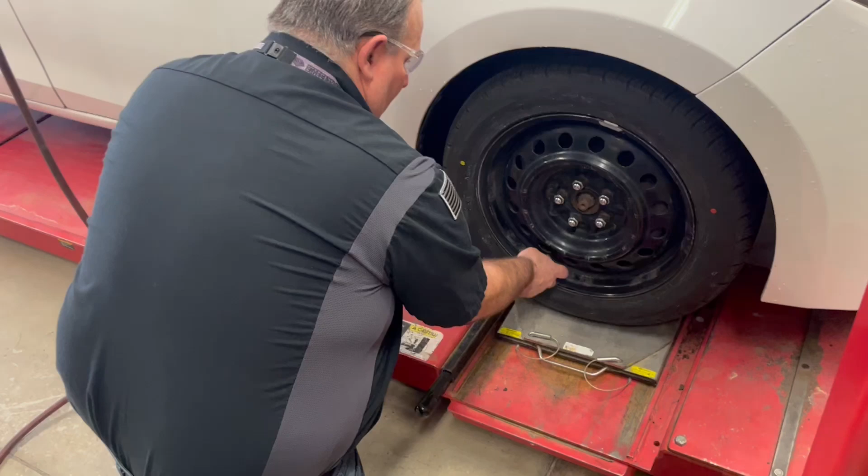To begin the alignment, we are going to remove any valve caps and inflate the tires to the specified PSI on the door jamb. This vehicle requires 35 PSI. I go and check all 4 tires to make sure they are at 35 PSI.

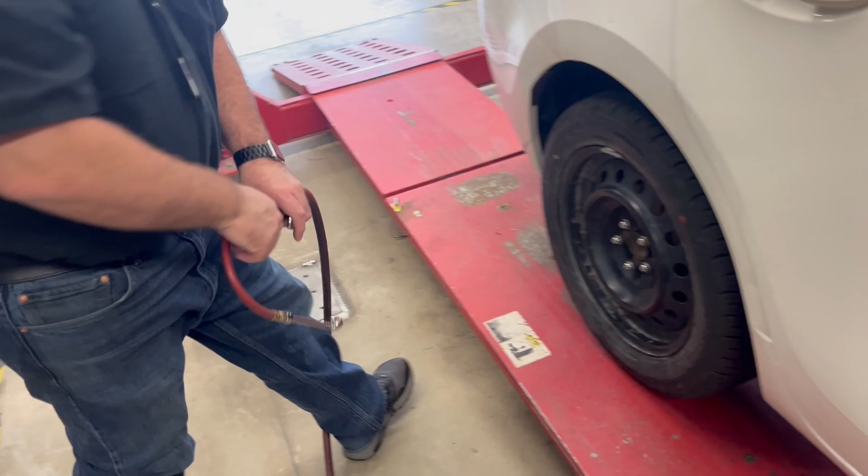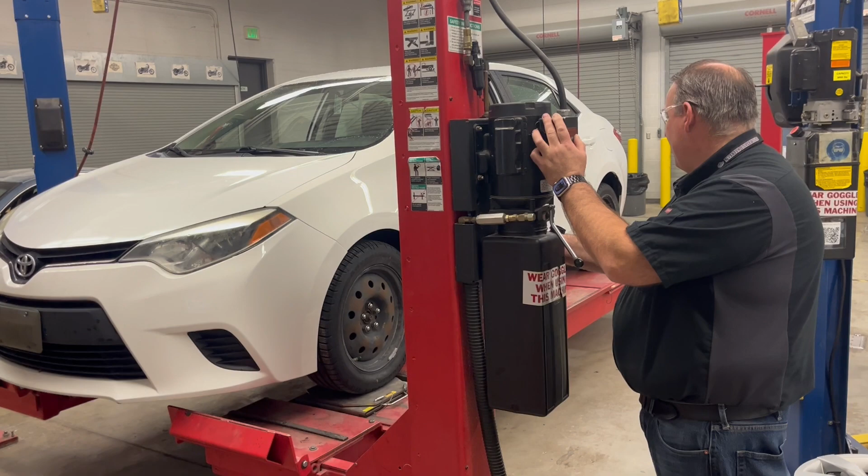After I inflate the tires to the proper pressure, I'm going to lift the vehicle on the alignment lift by pushing the button at the top and lifting it to about waist high, then lower it onto the safety locks.

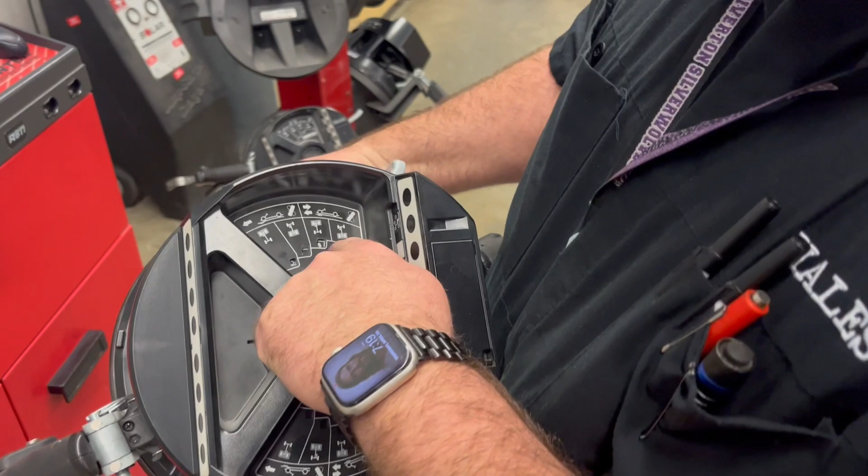Next, I'm going to grab the alignment head. These heads are equipped with markings, and you can see there are a couple of patterns where these heads are rotated with the tires. We have a front-direction-only head and a front-and-rear-direction head on the right.

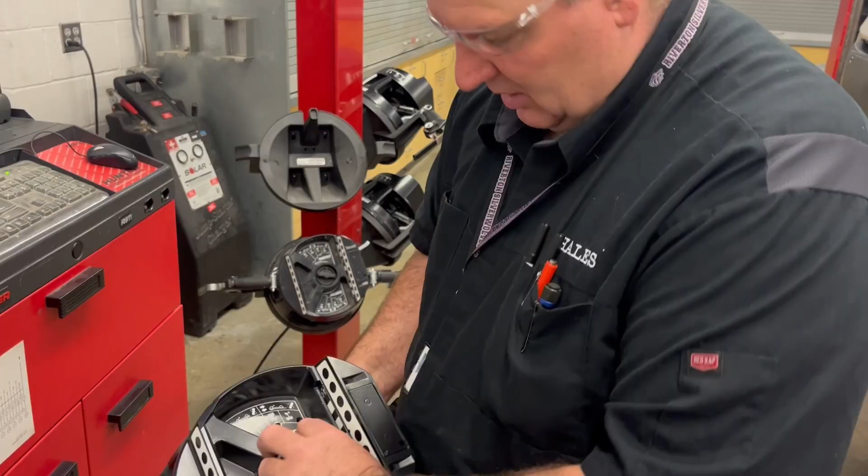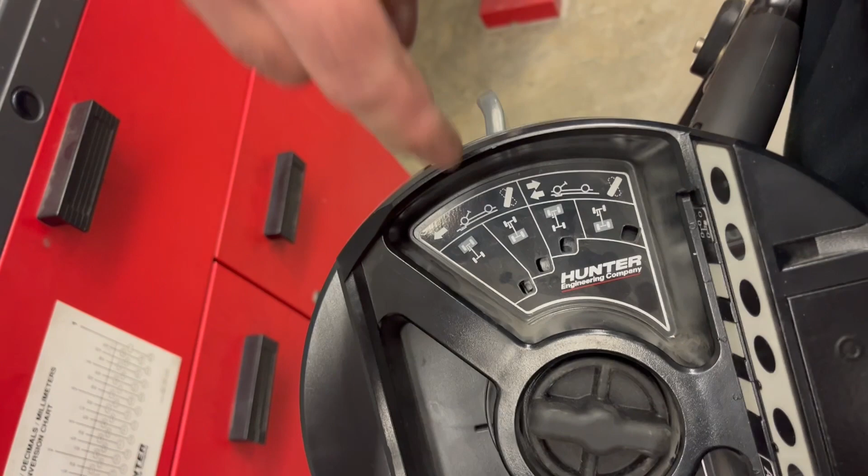On our machine, it's set up for front and rear movement, so we're going to roll the car backwards and forwards. There's a little window when you rotate this head to the proper number. This head is numbered 0, and we need to make sure the 0 is lined up in the third box over, for the movement of the wheels going back and forth. Then we just tighten the head down to make sure it's in the proper position.

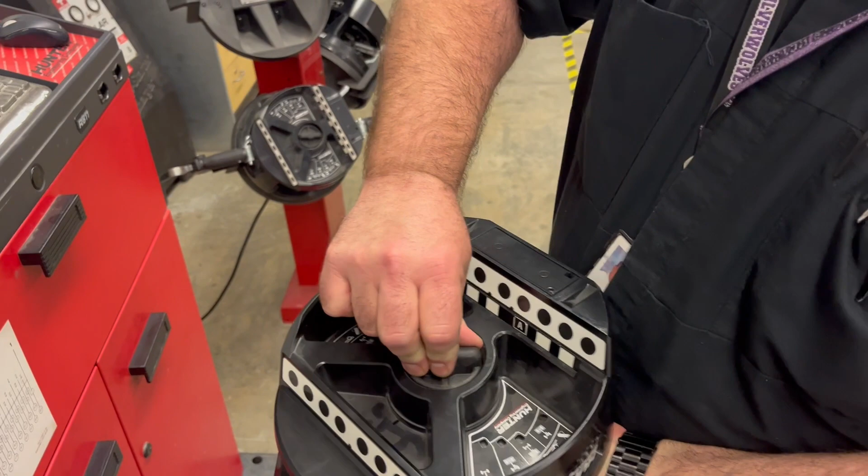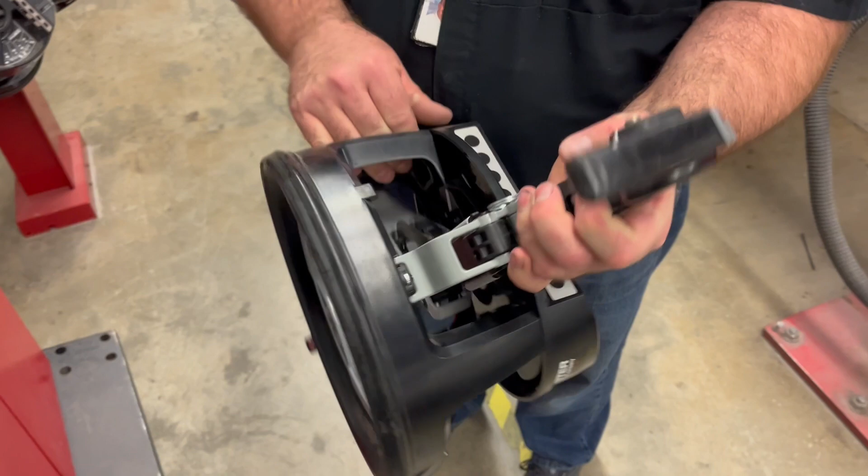Sometimes people twist these off, so we want to make sure they're aligned properly. After it's tight, with this in the 0 position and verified as a 0 head, I can adjust the arms by pushing this lever inside, extracting the arm out, and moving the lever in or out.

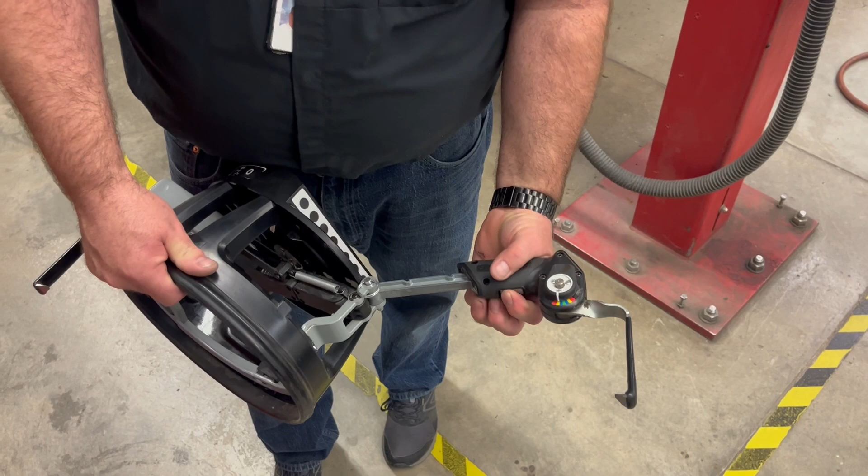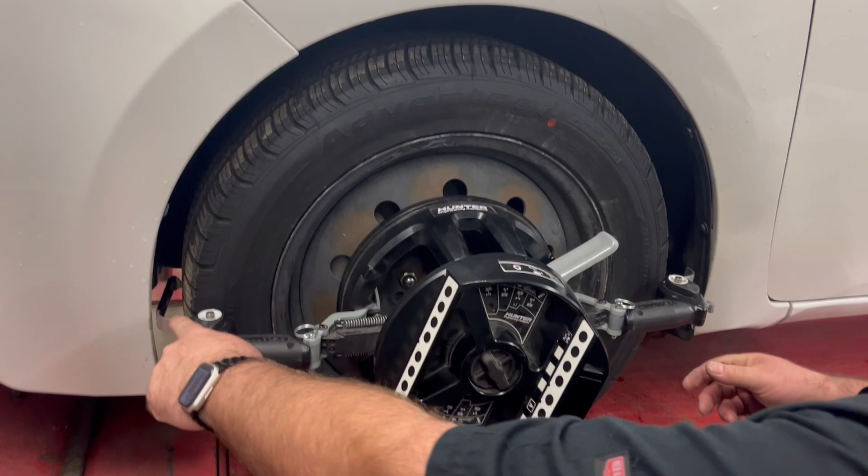This adjustment is based upon tire size. We're going to keep this to the lowest setting since these tires are on a passenger car. We just push these clamps up against the tread of the wheel in the 3 and 9 o'clock position, then pull down the latch to lock it in place.

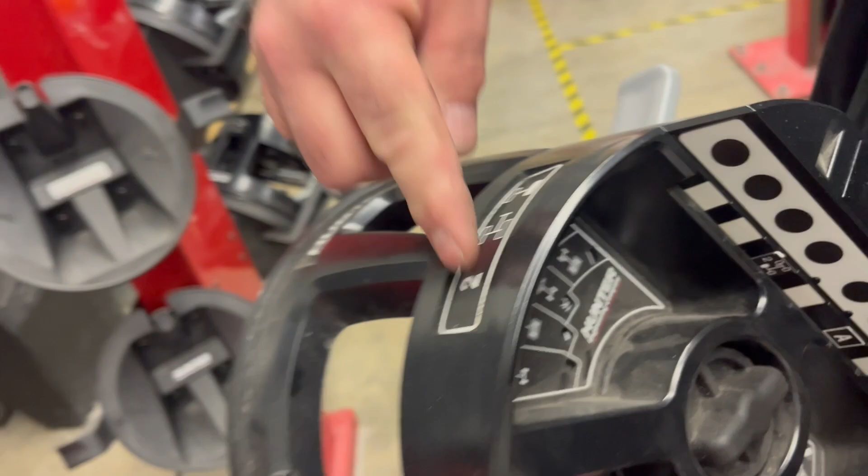We verify that this head has the number 2 marking, and number 2 is locked into place on the driver's side. Number 1 is on the passenger front, so we make sure the window says 1 and mount it on the tire at the 3 and 9 o'clock position, then lock the lever.

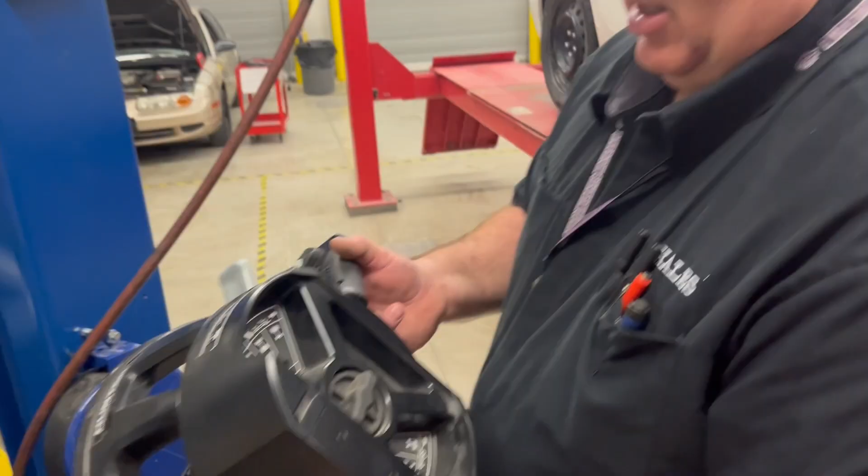The last wheel is number 3 on the passenger rear. We simply put that over on the wheel at the 3 and 9 o'clock position and lock the lever latch into place once it is secured against the wheel. Next, we go to the screen and begin the alignment.

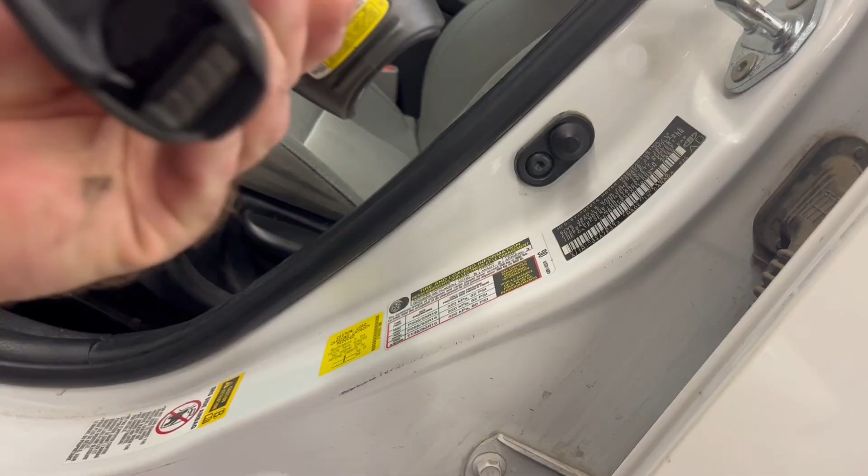It will populate with year, make, and model. We have this barcode scanner, and if the vehicle is new enough, we can scan the barcode on the door jamb and it populates the vehicle's year, make, and model.

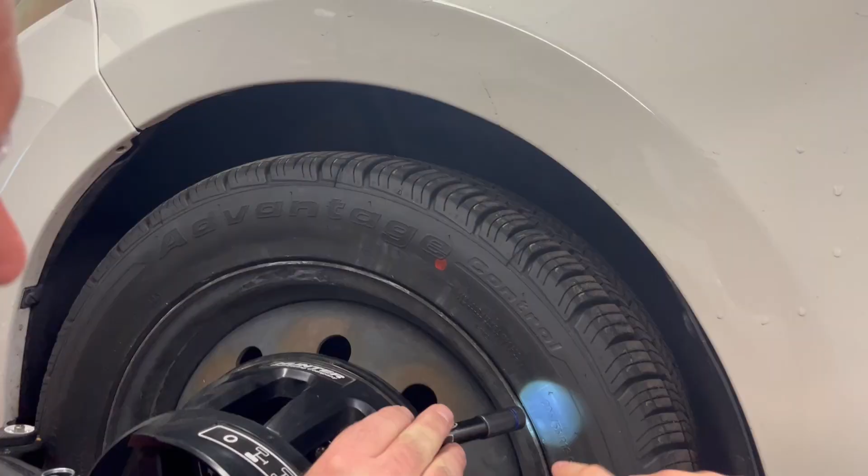It may ask us for a tire size in this case. We go over to the tire, read the size, go back and make sure we select the correct tire size, then select OK.

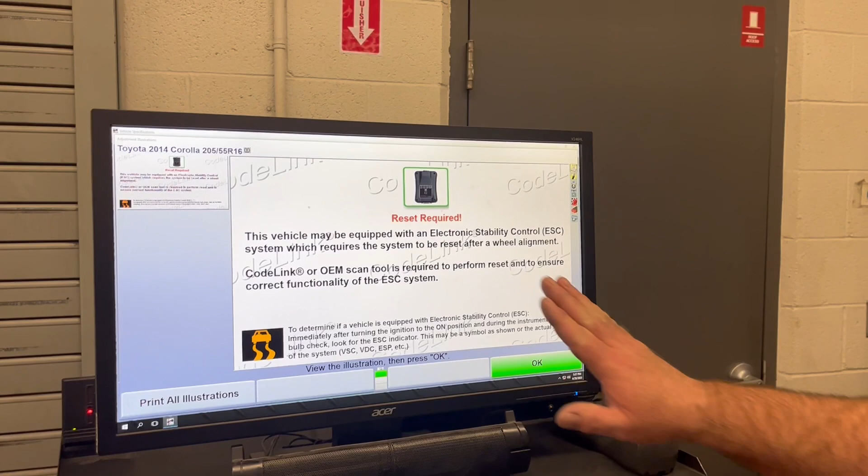This vehicle is equipped with electronic stability control, so for the electronic stability control reset, you need to make sure you know where this is after completing the alignment to reset the sensors for calibration purposes. Then we select OK.

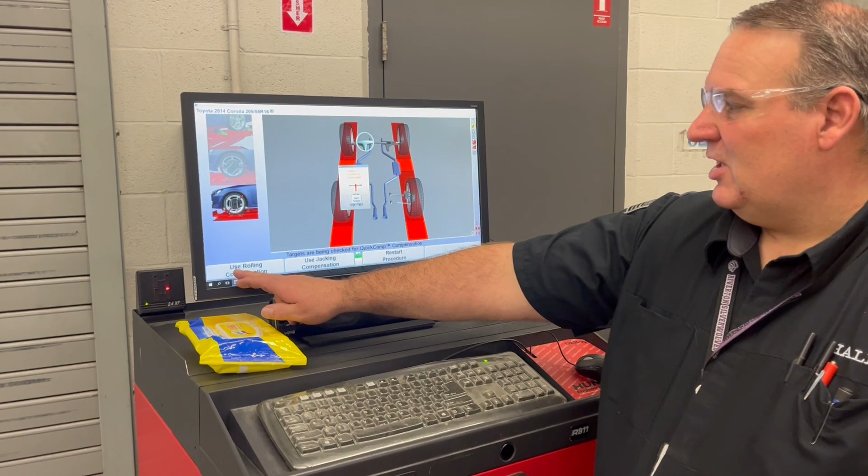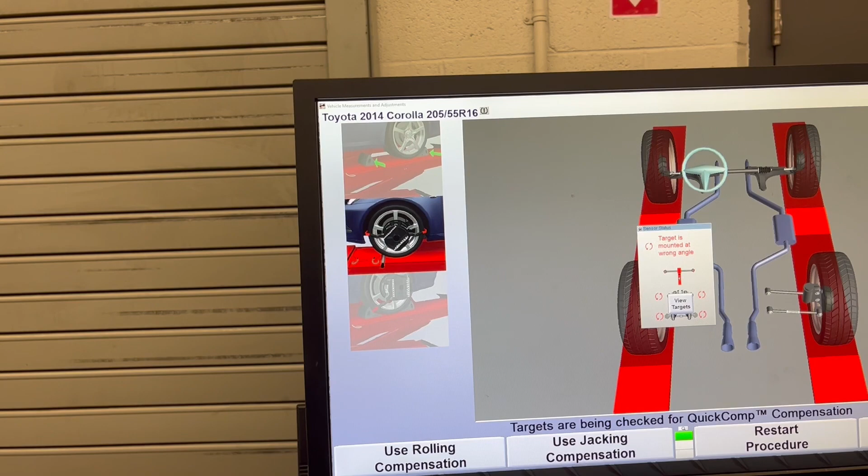On the side here, you can see there is jacking compensation and rolling compensation. It gives us some pictures with animation showing how to roll the vehicle, depending upon what type of roll we want to do on the alignment machine.

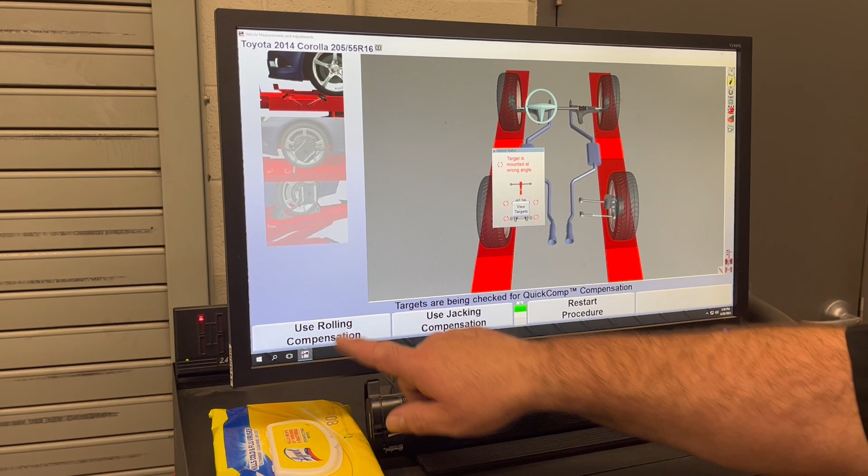Again, ours moves not just forward - we're going to move it back and forth. Our tires are on the turn plates, and we make sure these pins are attached, the turn plate bridge is flush with the lift, it's in the up position, and the pins are locked.

We grab the wheel chocks and position one behind the wheel and one against the wheel in the front. We go to the other side and make sure the pins are properly attached, with the turn plate bridge up and the pins attached there.

The vehicle now has to be put into neutral. If it's not already in neutral, we simply twist the key on, apply the brake on most of our cars, and then drop it into neutral.

After the vehicle is in neutral, with the key on and engine off, I make sure the steering wheel is in the straight-ahead position to keep it from going sideways on the lift. We then step down and roll the car backwards.

I'm going to grab the top of the tire, making sure I'm not positioned in front of the cameras that get the targets, and I'm going to pull back on the top of the tire as it rolls back on the screen.

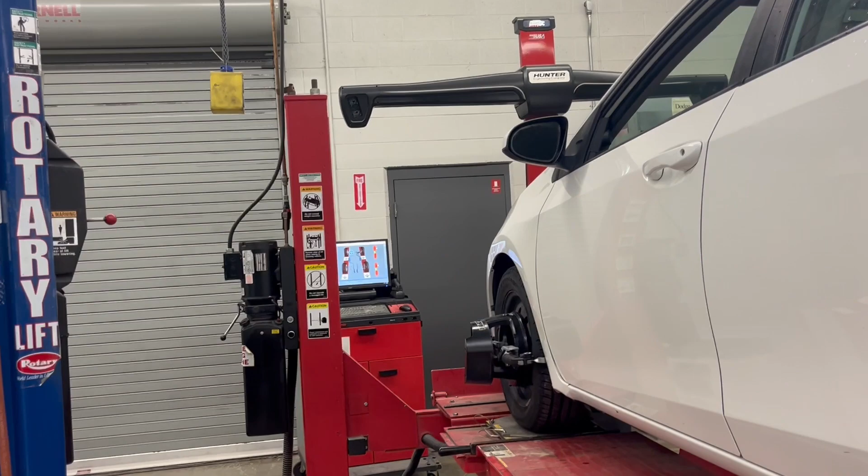You can see that the bar graphs will turn green. As they turn green in the middle, I hold and pause for a minute, it takes a measurement, then I'm going to roll forward until it goes back green. Because I didn't move the wheel chock in the front, it keeps it lined up, and then I just slide the wheel chock in the back.

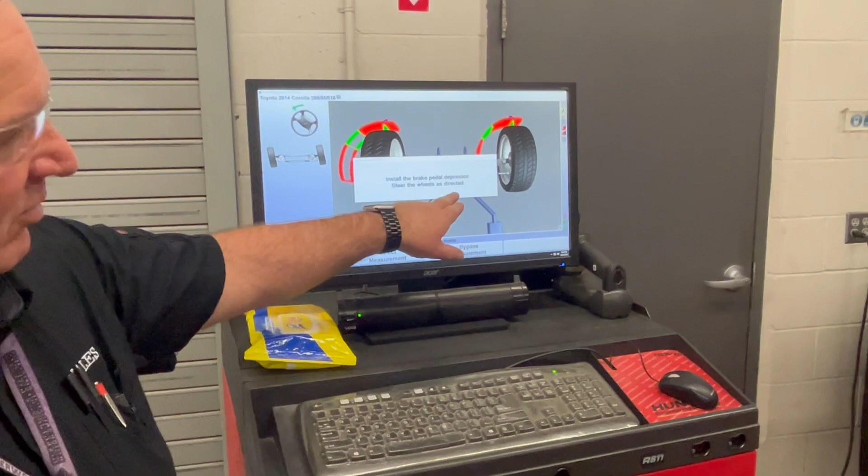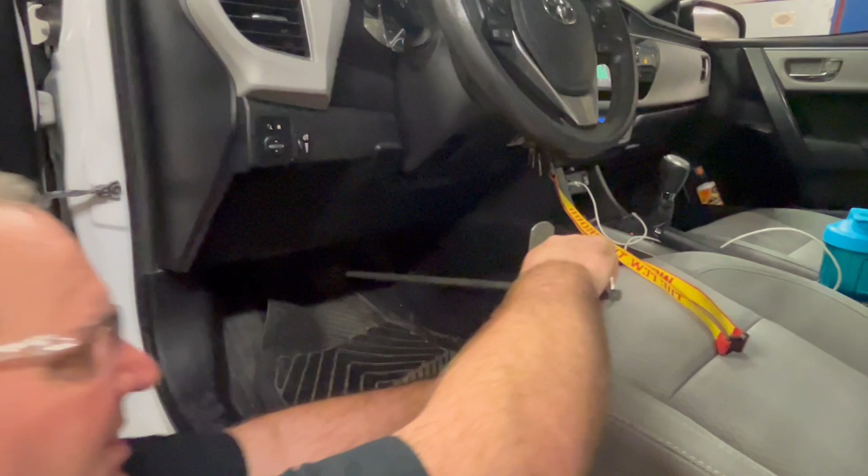Next, the directions tell me to grab the brake pedal depressor, and I'm going to turn this steering wheel left and right. Because our machine is not automated with the airlock disengage and engage system, I need to apply the brakes. Before I turn the steering wheel, I'm going to have to remove the turn plate pins.

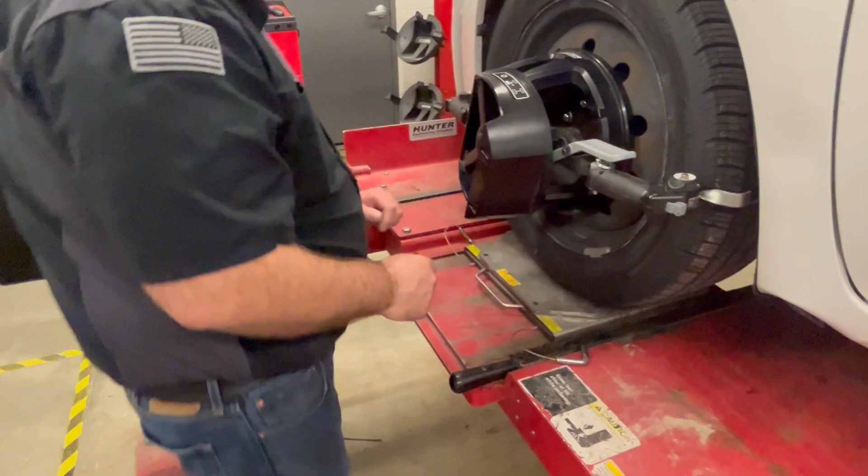So these turn plate pins, if I have rear wheel steering, need to be unplugged in the rear. And then I go to the front and I pull or twist the turn plate bridge down and pull the pins out in the front wheels because the wheels need to turn on these turn plates. The turn plate bridge down, and then the pins are removed on all turn plates where we make our adjustment.

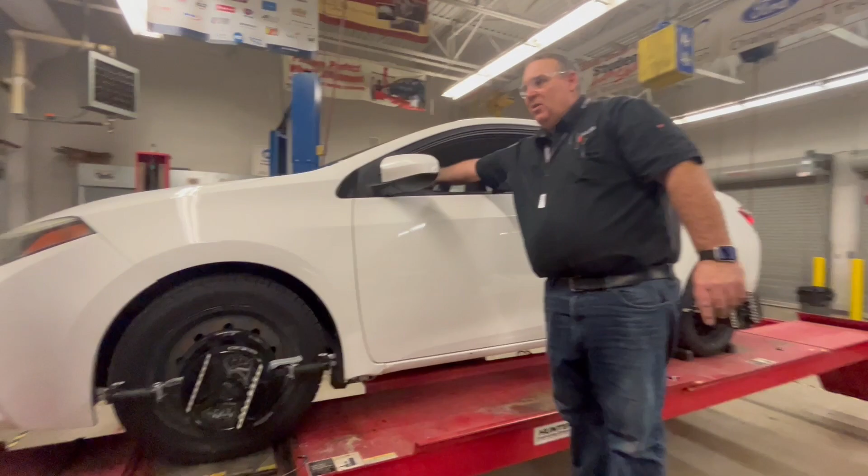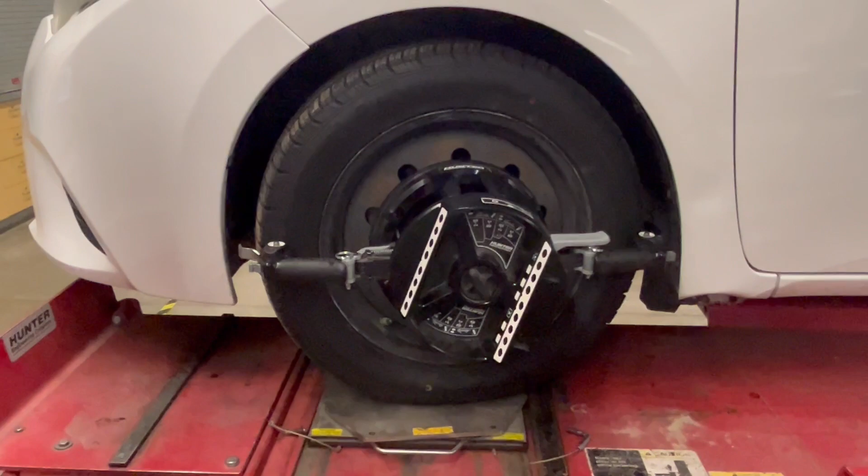As I twist the steering wheel, I'm going to not touch the car, reach through the window, and on a stool, I'm going to turn the wheels to the left where they light up green. This takes a caster measurement to the left. The wheels are on the turn plates, and you can see how the wheels turn to the side to take that measurement. Next, I'm going to turn the wheels to the right.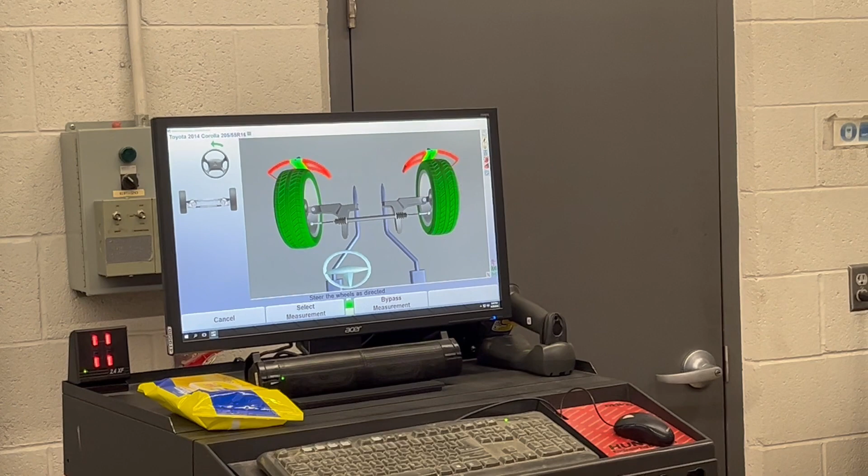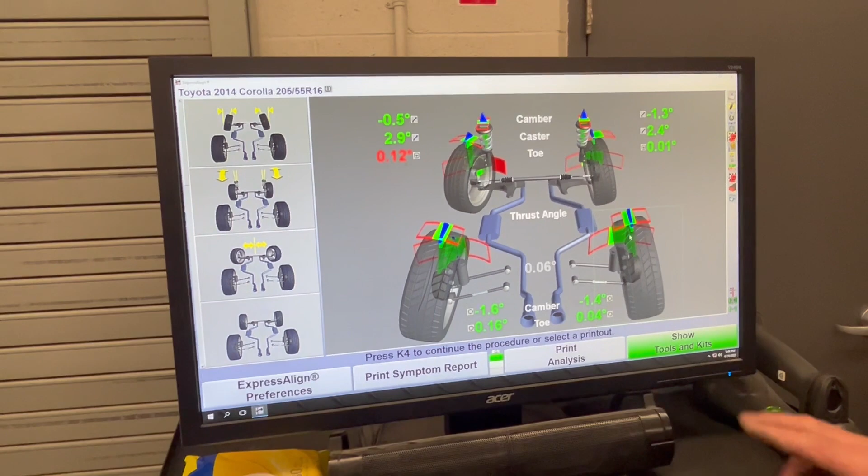And again, this is measuring caster as it is moving back and forth. And also, this is called camber roll as we're moving it to measure that caster and camber roll measurement. I move the wheels back to the straight ahead position, and all of the alignment angles will populate onto the screen. Green is good, red is bad. The little green bar there will then tell me all of the tools needed to make this alignment happen.

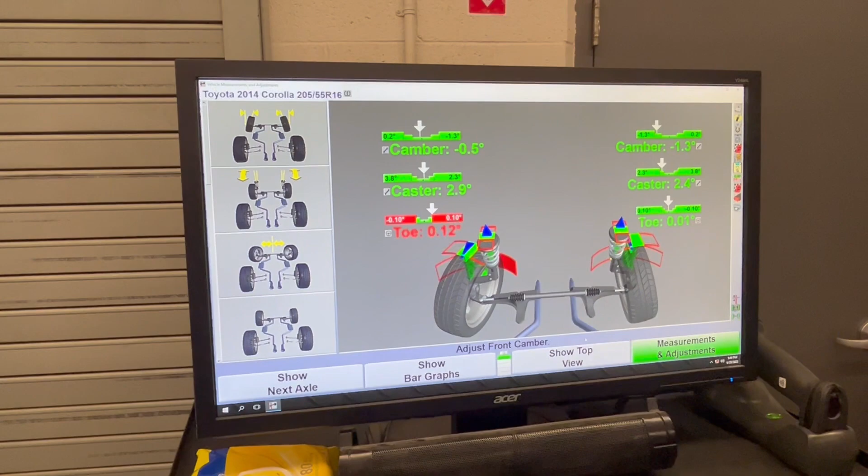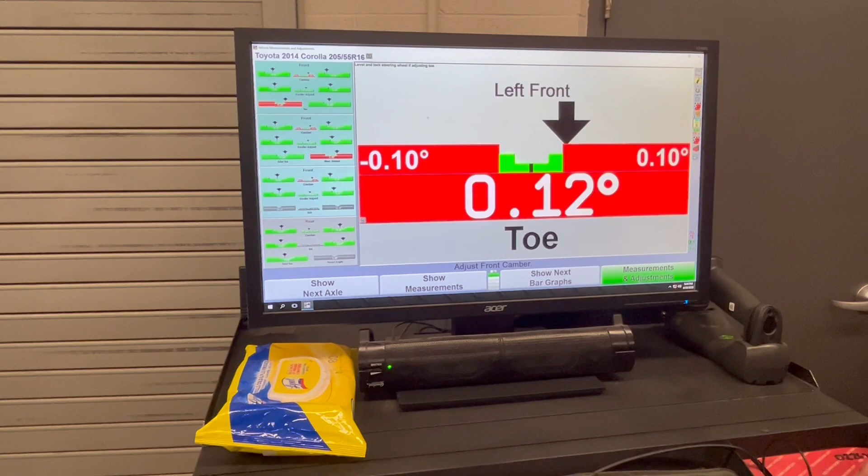After I see those tools, there's a screen that will pull up and give me the different measurements. I use these measurements. I'm going to measure the front toe, and I need to adjust that front toe, and I can use these bar graphs to populate based upon my eyesight to make that measurement.

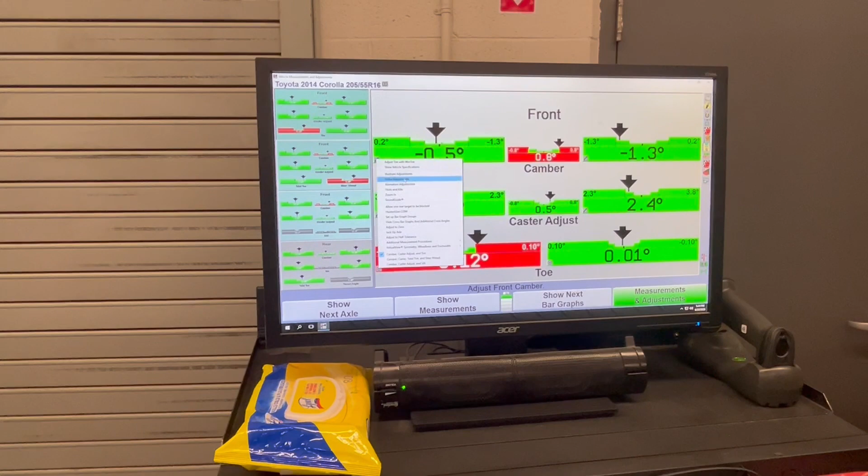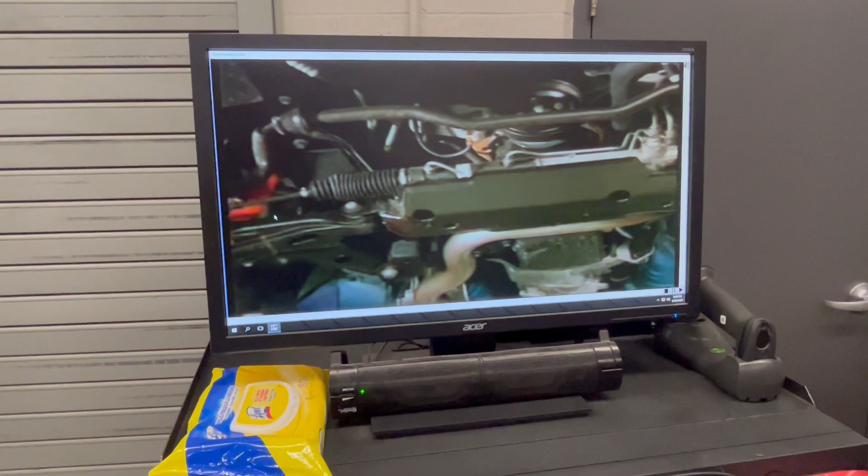This little screen gives me the option when I go into video adjustment, how to adjust the toe on this vehicle. You can see it gives me a play-by-play video, and for me to adjust, I'm going to adjust with WinToe as I select the steering wheel on that bar graph, and then I read the instructions on what it tells me to do.

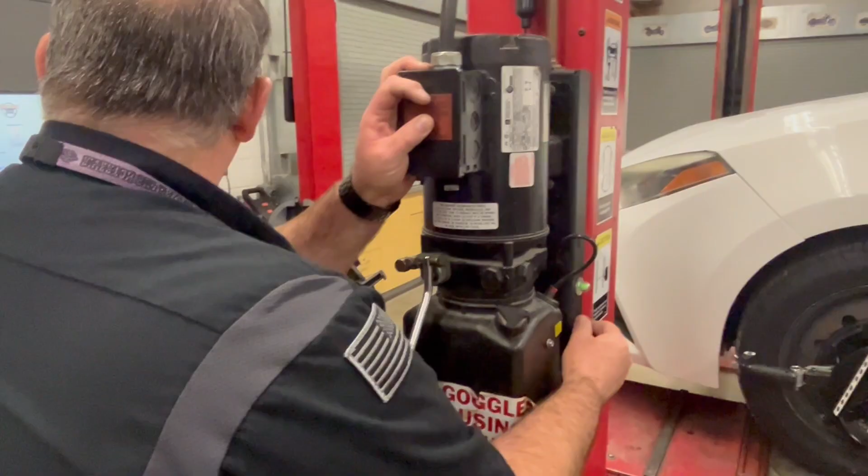So it tells me to start the vehicle and make sure the steering wheel is straight as I do this adjustment. Turn off the vehicle, but leave the key on, engine off. And next I'm going to lift the vehicle up because I am adjusting the toe. Instead of crawling around underneath the car, I like to get it where I can work underneath it. You may need to lift the alignment cameras on the cross beam and make sure, again, you're following the proper instructions step by step before hitting the green bar.

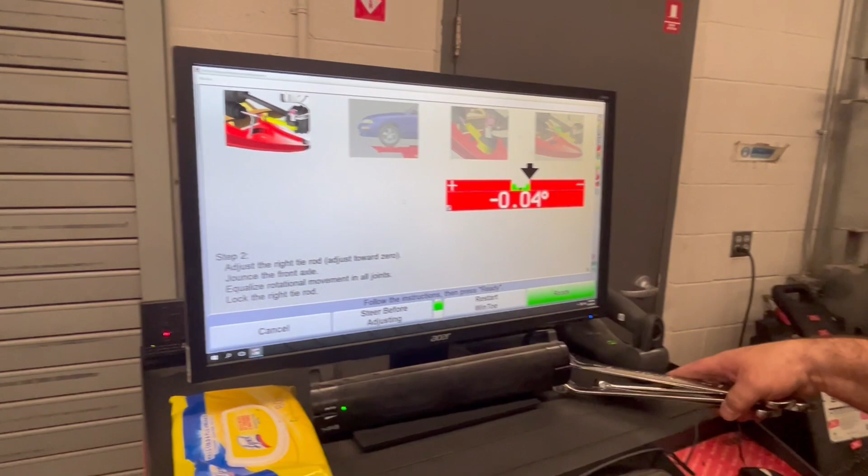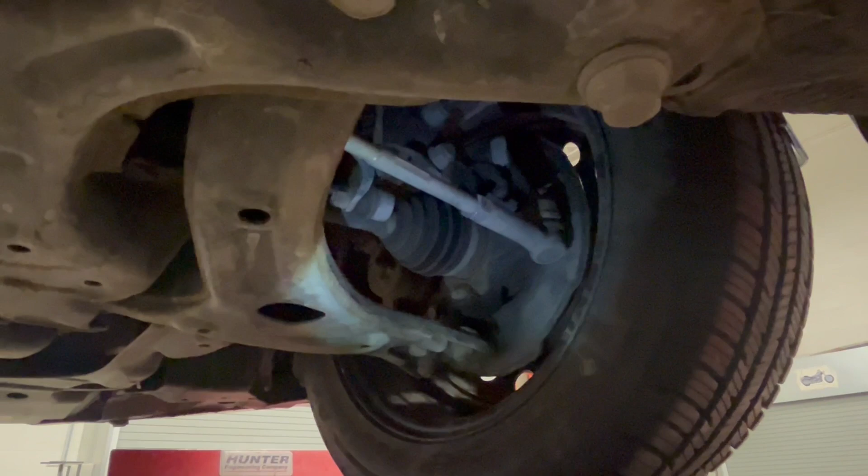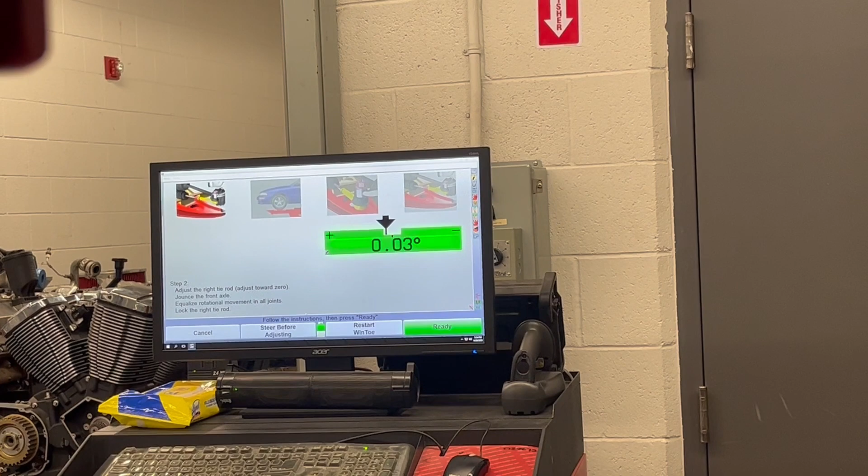After I see what needs to happen, it gives me animated views of what I need to do to make the adjustment. So I'm going to break the jam nut loose. After I break the jam nut loose, then I'm going to twist the inner tie rod to make the adjustment. So with a different size wrench that it gave me on the tools and kits, I twist that inner tie rod to make my adjustment for the toe on the right side of the vehicle.

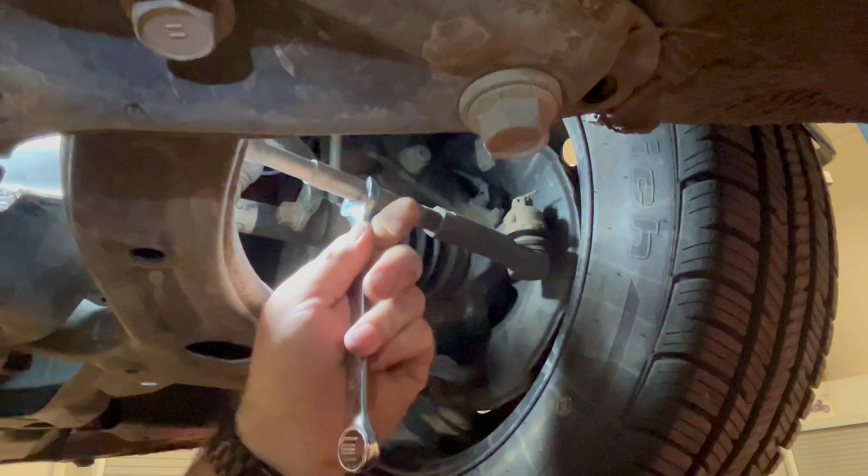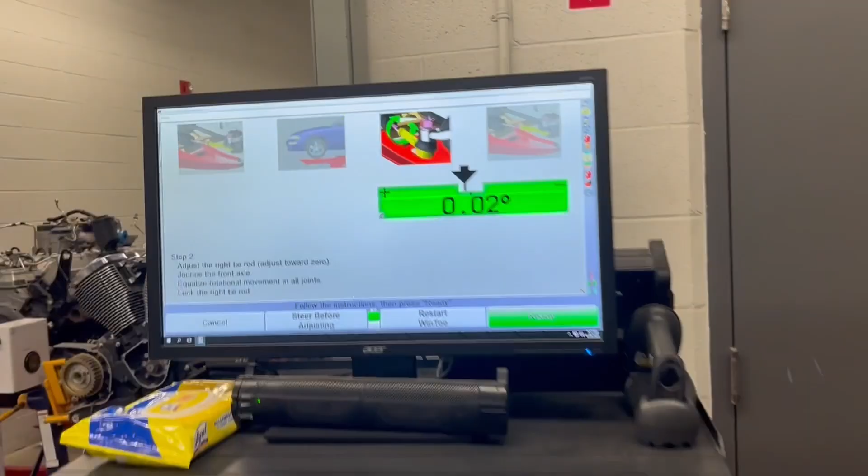After I line up that adjustment, I'm going to hold the inner tie rod into place. It's important that I do this when I tighten the jam nut because the jam nut can sometimes twist that shaft and it goes out of alignment again. So I want to make sure and tighten the jam nut, holding that inner tie rod so it's nice and tight. After the jam nut is tightened properly, I grab on the vehicle to jounce it, and that settles my measurement down to go to the next tie rod.

And so I repeat the same procedure on the opposite side of the vehicle, where now I'm working on the left side by breaking the jam nut loose, and I twist the inner tie rod to make the adjustment, and that will move the arrow on the bar graph as I visually see how I'm making this adjustment. As I'm twisting this shaft, it will move the inner tie rod in or out and move the toe of the wheel.

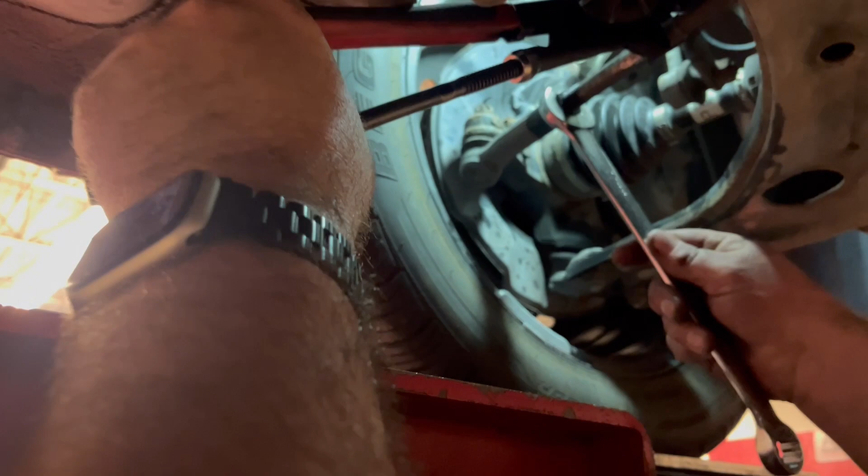After I get the measurement where I want it, I'm going to tighten the jam nut. This is some Snap-on alignment tools that gives me a little bit of leverage. And I again make sure that jam nut is secured up against the outer tie rod.

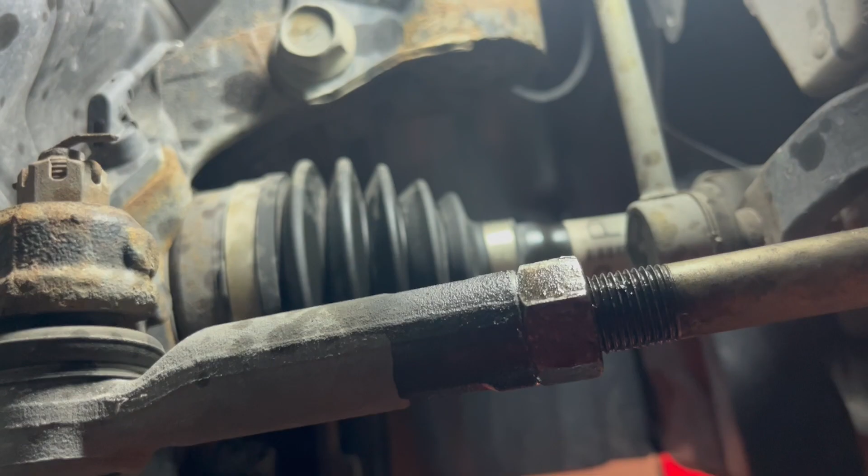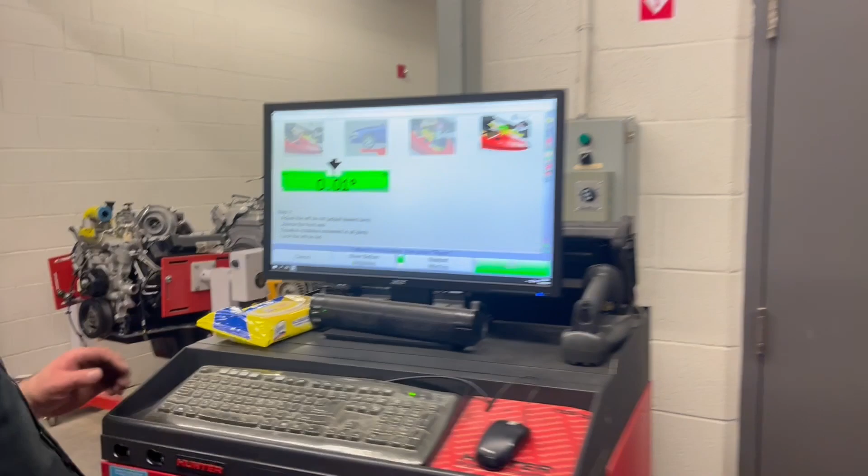Next, I move over and jounce the vehicle by pulling down on the vehicle, and everything settles on the suspension and everything stayed good in the green state. Next, I'm going to move the steering wheel to the straight ahead position. So I'm going to start the car, move the steering wheel to the straight ahead position, make sure it's straight, and then I'm going to turn the key on, engine off, and hit continue.

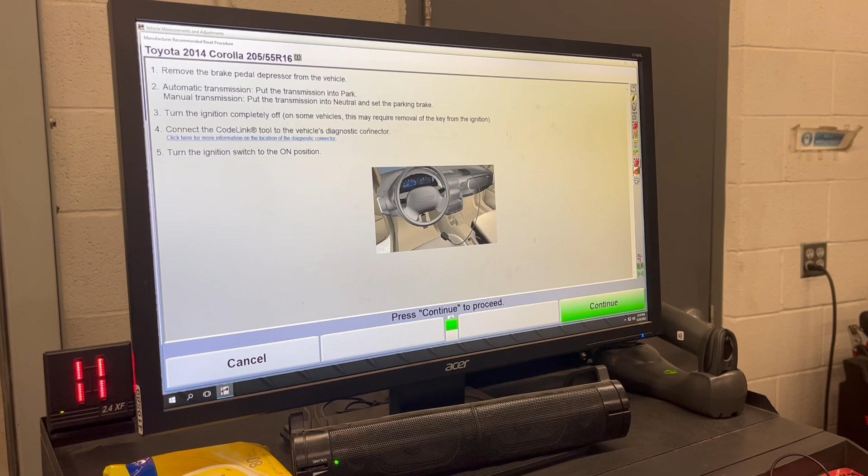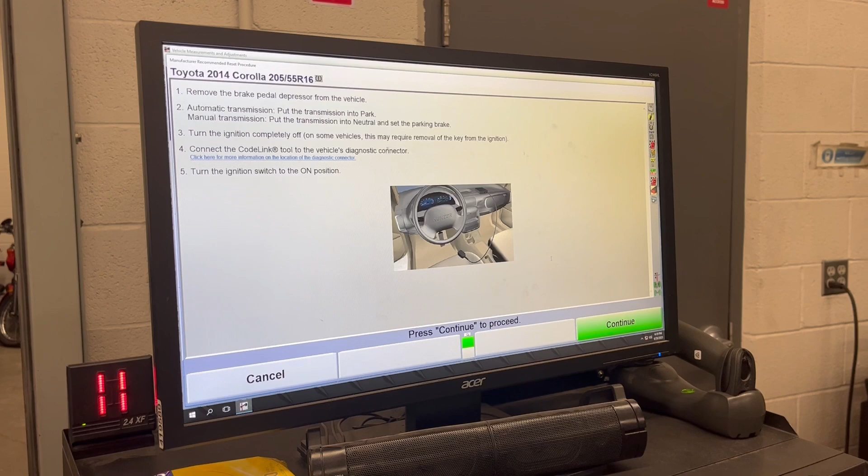After I do that, you can see my toe is now good, and now I need to reset the steering wheel because this is an electronic steering system. So we have that CodeLink connector. We plug that into the back of the machine. We're now going to follow the instructions like it told us.

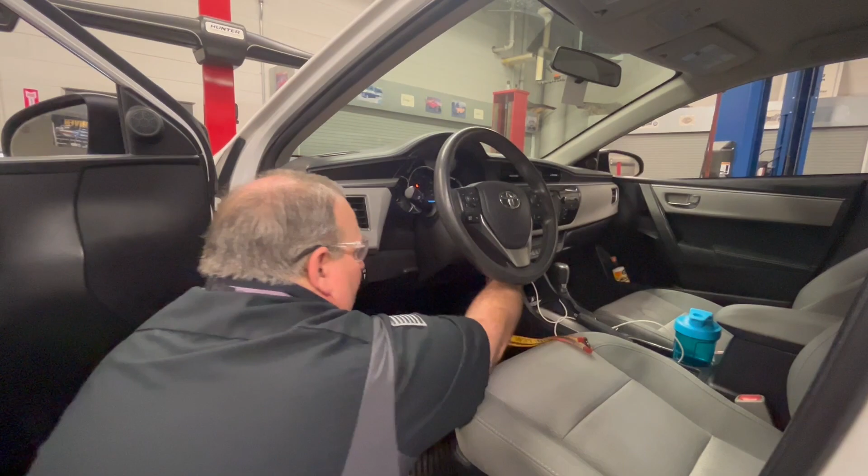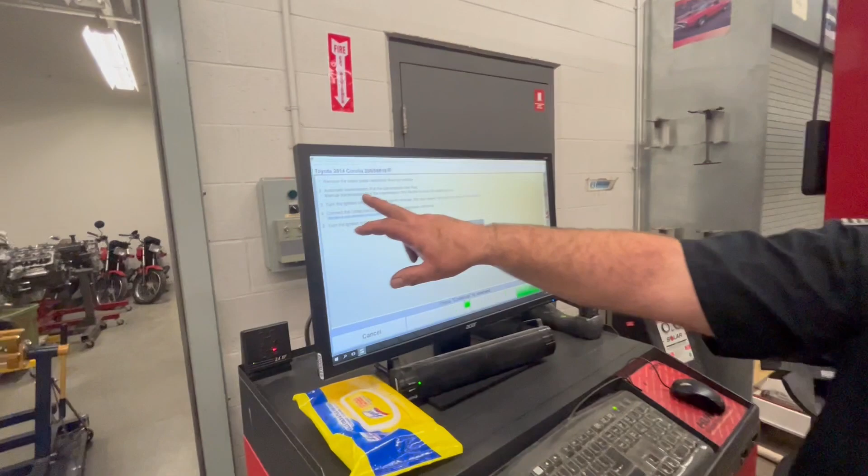I'm going to remove the brake pedal depressor, put the vehicle in park, turn the key off, remove the key just in case. Then I'm going to plug in the OBD2 CodeLink connector, turn the key on, engine off. I don't want to start it. And after I've gone through that procedure, I verified that I did everything correctly before I hit continue.

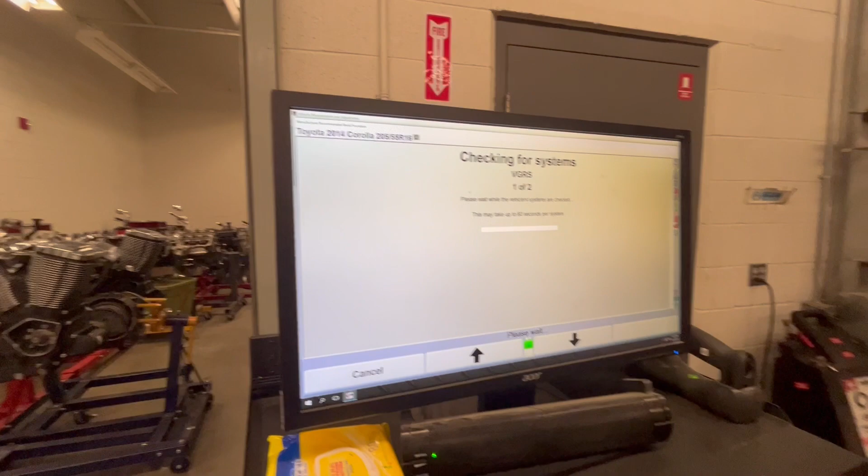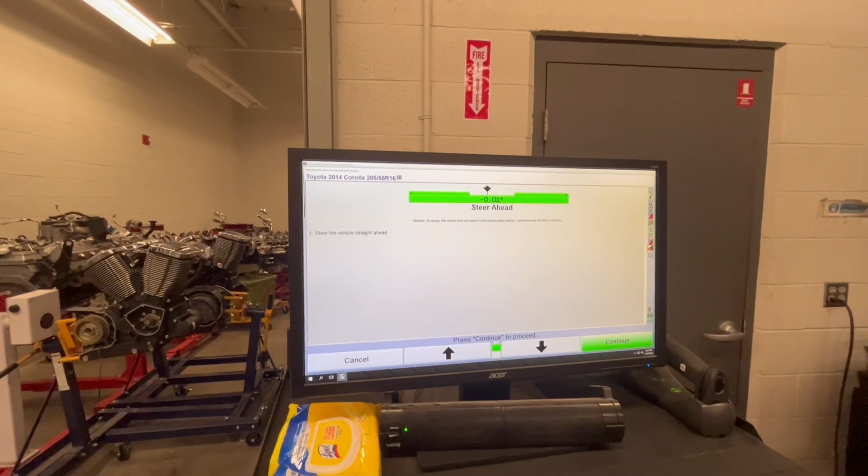After I hit continue, it will go through and it starts to erase old data on the computer, and it's going to now verify that my steering wheel position is straight ahead. So I double check to make sure my steering wheel is in the straight ahead position, which it is, and then I select OK, and it's going to now update with steering wheel position.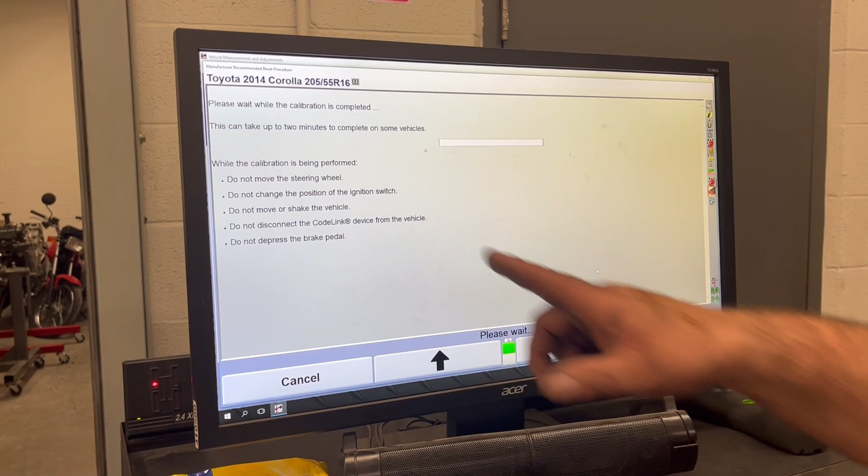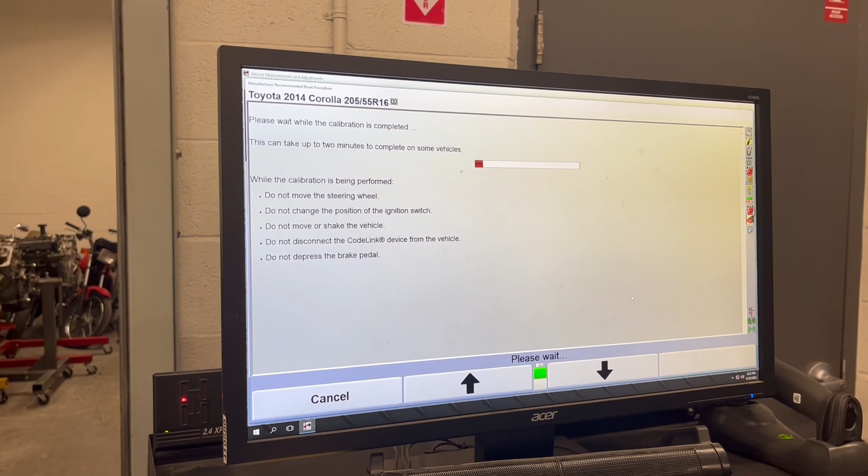Now it says that I don't want to unplug this CodeLink connector because it erased that information. I don't want to move the steering wheel. I don't want to play with the brakes. I don't touch the car as this vehicle is uploaded. This screen tells me if the ABS and the traction control light is flashing, and you can see that they are. So it's alerting me to see if this is working correctly.

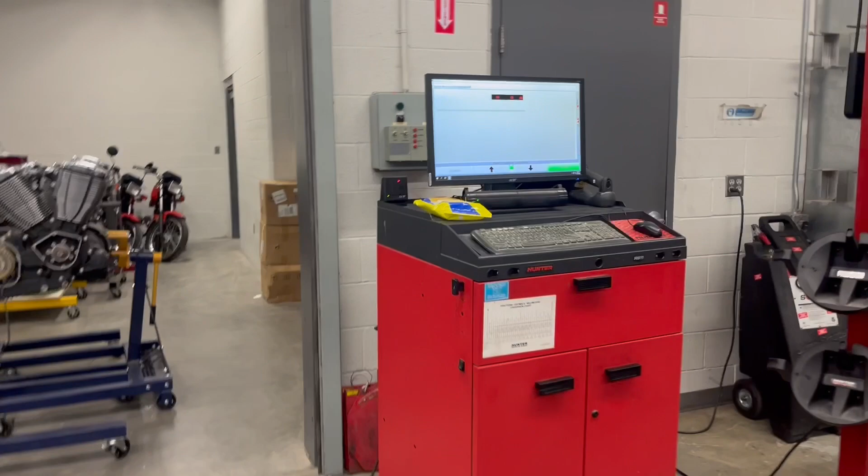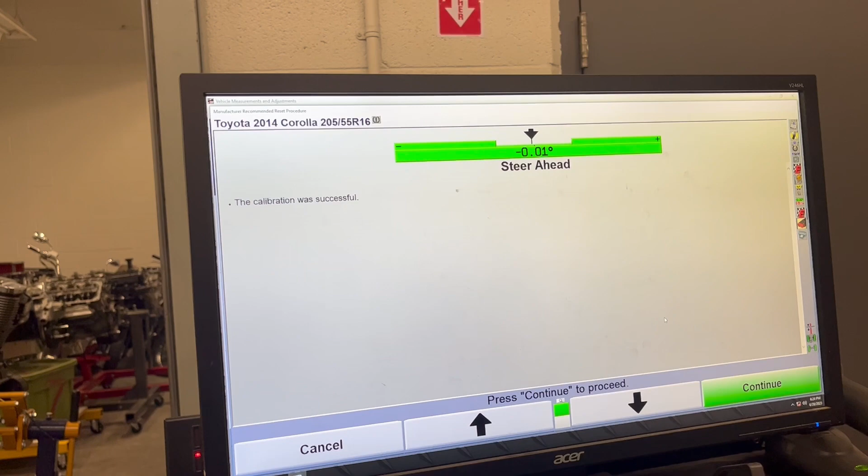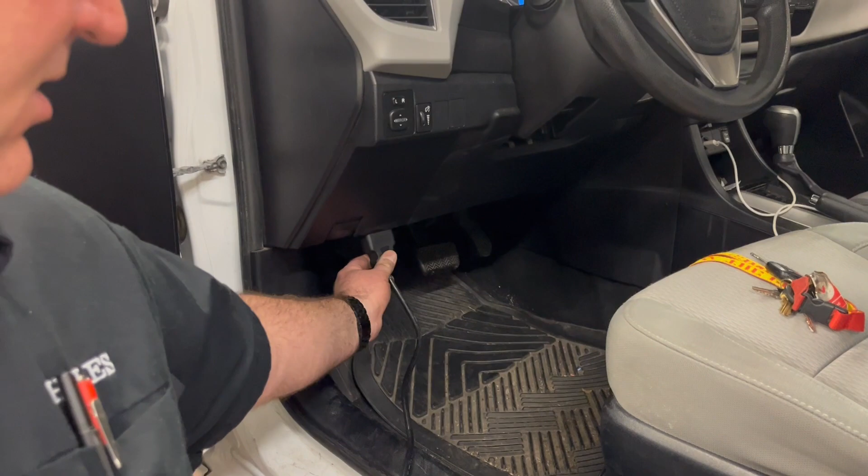So now I'm going to go back and continue the process of this update. So this is just verifying that everything is going smoothly, and it will continually update with the sensors. And then it says if the steering wheel is straight, it is complete. So after I select continue, it will load up the last few things, and it walks me through how to unplug the system. So in this case, I need to turn the key off, and I remove the key just to be safe. Unplug the CodeLink connector.

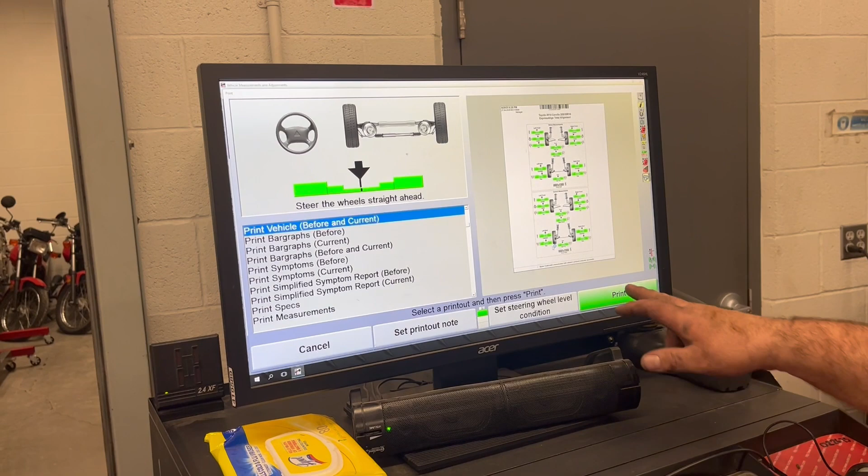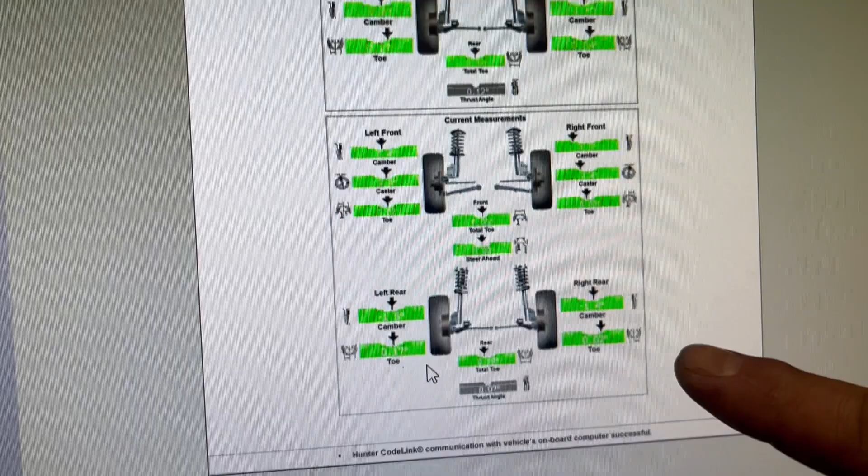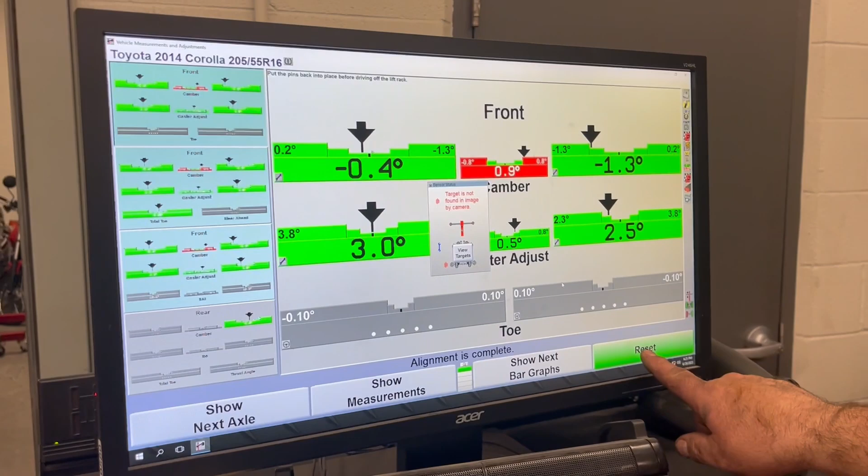After I unplug that CodeLink connector, then I hit continue and make sure the steering wheel is in the straight ahead position one last time, and it gives me all the measurements before and after. So whatever the car came in with before measurements, what it left with after measurements, this is going to go to the customer. So I would want to print this information to give to the customer. When I am done with the alignment, I simply select the reset button, push yes, and it resets back to the original screen to begin another alignment.

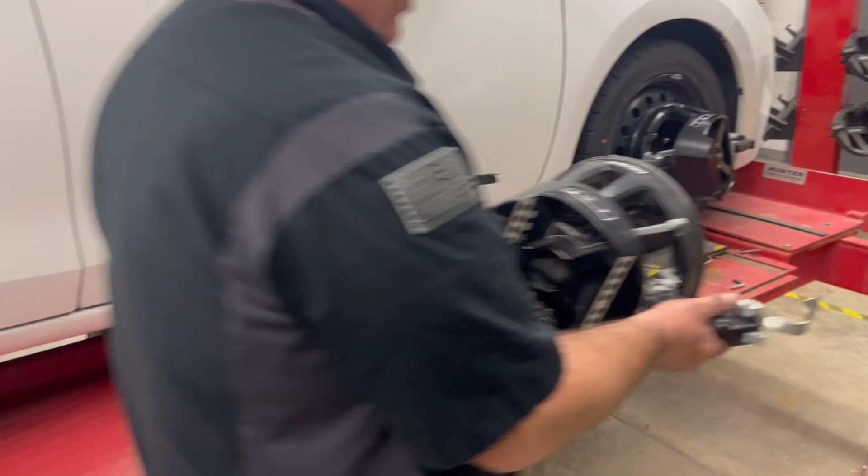Make sure that we put the turn plate pins back into place. Remove the target heads after any measurement has been put into the car. And we're going to hang the alignment heads back on. Here, we do not want to run over these alignment heads. They're very expensive. Remove all tools, turn plate bridge up, pins back in on the turn plates, and then we're going to lift the lever up, pull the target off, hang the target back up into place.

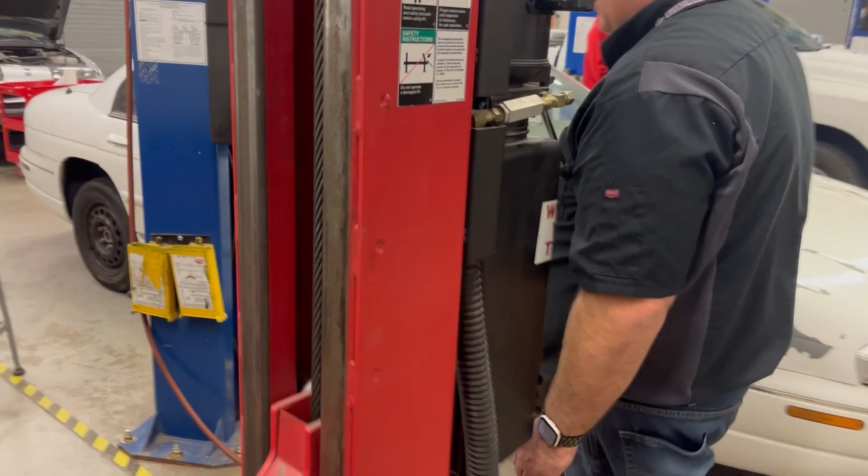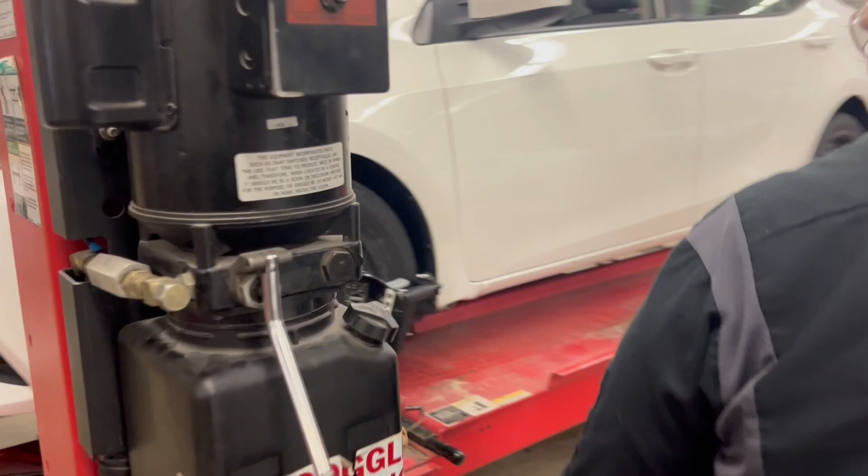So we do the same procedure on the other side. We're going to remove the alignment heads, make sure the pins are back in on the rack so that it doesn't break the turn plate pins, remove the wheel chocks, and remove the target. Put the target back up over on the aligner rack, and the same procedure in the front, turn plate bridge, pins in place, alignment head put away.

You may have to move the wheel back and forth on some of these to get the pins lined back up into the plates. Don't forget the brake pedal depressor. Make sure that you hang that up along with gathering up any of the tools which you don't want to run over as you remove the vehicle. We want to lower the vehicle down to the ground and then drive the vehicle away, and you're done.